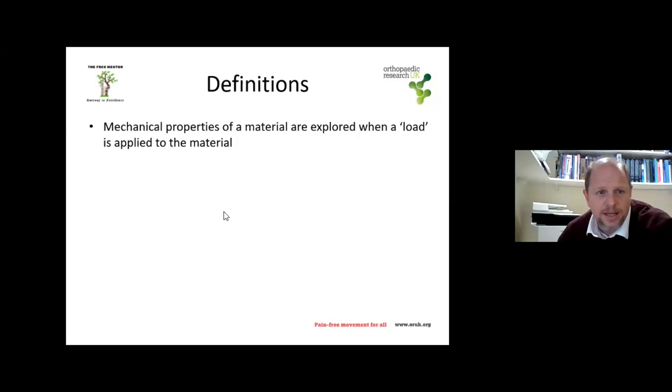And so material science is really about exploring the properties of a material, but we can't just explore them by looking at a material. We actually have to apply a load to a material and see how that material behaves when a load is applied. And that's one of the key things about understanding material science, that it's how a material responds to a load which is applied to it.

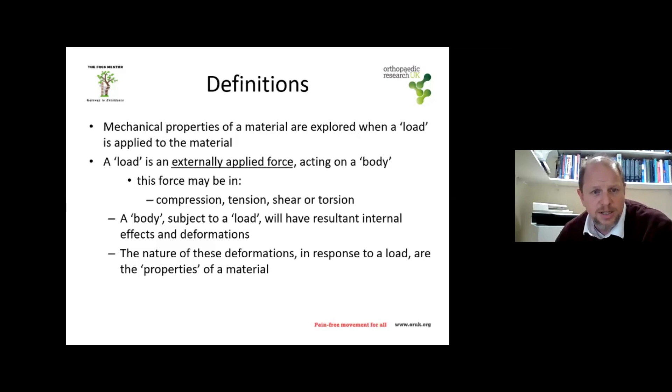And of course, as you can imagine, a load is an externally applied force, and it can be applied in different directions, like compression or tension, shear or torsion. And as soon as we apply a load to a body, there's going to be some internal effects or deformations of that particular kind of body. And those are the kind of effects that we're going to be studying in material science to give us a list of properties, mechanical properties or material properties of a certain type of material. And those are the kind of terms that we use.

Those deformations that I mentioned that happen to a body when a load is applied to it can either be elastic deformations, which are temporary. In other words, when you remove the load, the shape of that material will go back to what it was before. And plastic deformations are permanent changes in length or shape. And in general, and we'll see that on the stress strain graph in a minute, the degree of deformation is proportional to the amount of load that is applied to a material.

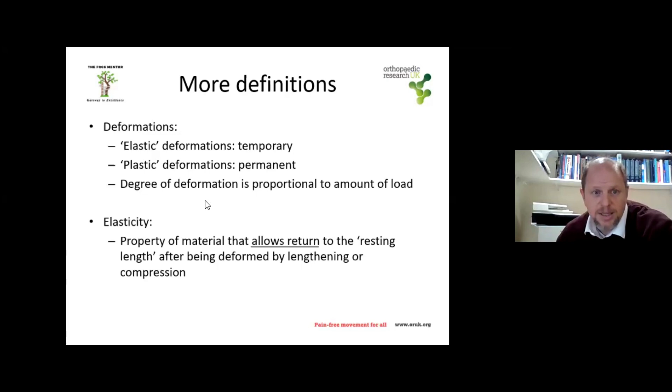And then we also have a concept of elasticity, and that's important for us to understand because it's the ability of a material to return to its original resting length after a load has been applied and then removed. So, again, we'll see that on the stress strain graph as well, but these are just some of the terms that we're going to be looking at.

What is stress in a material? So it's actually the intensity of an internal force. It's very similar to pressure. And in fact, it has the same units as pressure, which is Newton per meter squared or force per area, otherwise known as pascals. So whilst we can understand if a pressure is applied externally, we can understand that.

Actually, when we apply a pressure, when we apply a force to a body, we may not see any obvious deformation, but there will be an intensity of that internal force within the body. And that's really what stress is. It's used to analyze the internal resistance of a body to a load.

And normally something actually has to go on in there, because Newton's third law is every action has an equal and opposite reaction. So if you're applying a force onto a body, something is going to be happening within that body to resist the force that is applied on it, even if it doesn't move. So those are some of the principles.

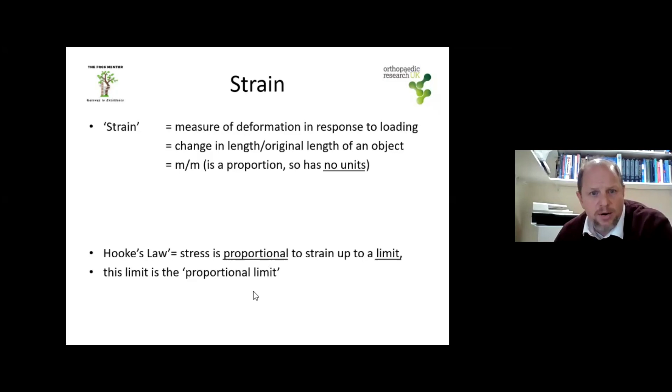So I want to come on to the stress strain graph. But before I do, I just want to talk to you a moment about the Young's modulus, because the Young's modulus is actually a measure in the stress strain graph of the slope of that proportional zone within the elastic zone. And the Young's modulus, which I'll show you on the graph in a second, is a measure of stiffness of a material. And quite often there are questions about stiffness of a material because it does have a relation to the effects within a system, like for instance stress shielding and things like that. So we'll talk about that in a second as well.

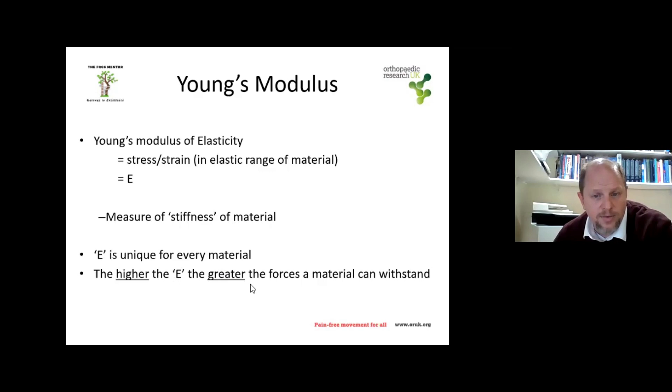And the E, which is the measure of Young's modulus of elasticity, is unique for every material. So sometimes we want to know where it is in relation to each other. So different relative Young's moduluses. And the higher the E, the greater the forces that a material can withstand. So let me show you this. This is quite an important graph to try and remember some of the details from. So it's the first time we've seen a stress strain graph.

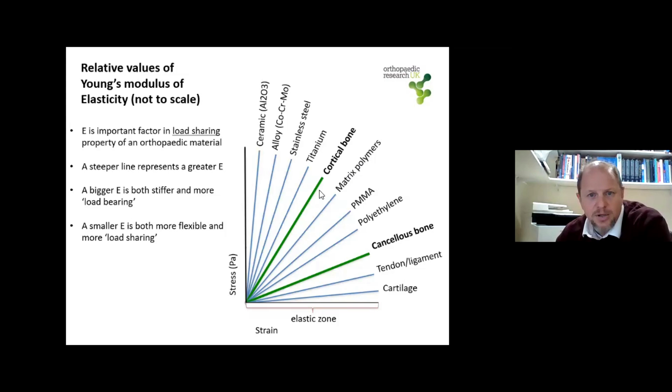You can see some of these other materials coming down here, like polymethyl methacrylate. You can see high density polyethylene there, cancellous bone, and then coming down to some of the biological tissues that really don't have much strength. So that's a pretty useful graph to remember, especially up at the top end, as those do tend to come up in multiple choice questions occasionally.

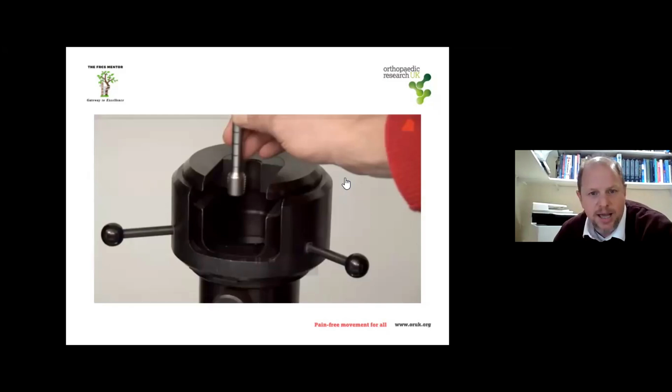And what that means is that the material is in the elastic zone. It is the elastic zone because it has the ability, if you remove the load at any point during that element of the stress strain graph, to return to its original length. If you go beyond the proportional limit, then new things start to happen, which I'll show you.

Unfortunately for us, the proportional limit has a number of different names which you can read in different books, like proportional limit, yield point, elastic limit. But within the context, you just have to realize that there's this absolutely critical point on the stress strain graph where you move out of the elastic zone into the plastic zone, and that is something like yield point or proportional limit, depending on what the particular question is asking.

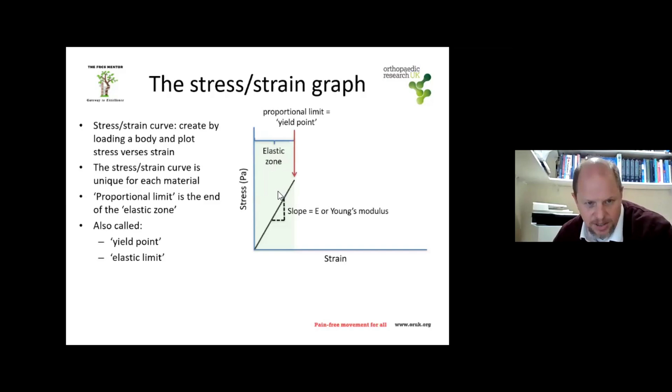So if we carry on along the stress strain graph, what we're going to see is exactly what we've looked at before. So we get to the proportional limit or the yield point. If we carry on applying this tensile strength, what immediately happens as you begin to get deformation within the material is it actually releases some of the stress in the material. So you can see the stress going down.

If, for instance, you took away the load at that particular point, you would get some elasticity, but you would not return to the same length that you had when you first started. And so you would have a deformation. And we call that deformation, if a load is removed, the plastic strain deformation. In other words, you've gone through the elastic zone, you've had permanent deformation, but then you've released it, and that's the final plastic strain deformation that you're left with.

If you don't remove the load and you carry on applying increasing load to that material, you find that the stress begins to build up again. The stress builds up and up and up until it gets to a point where no more stress can be held within that particular material. And we call that the ultimate strength. In this case, it's a tensile test, so we would call it the ultimate tensile strength, but it can be the ultimate strength. Sometimes we talk about, is a material strong? Well, that all depends on what is the maximum stress that that material can cope with.

A couple of other things that do come up that I want to mention about stress is that there are two other viscoelastic properties that we make use of in orthopedics. I haven't talked a lot about viscoelastic properties in this talk, but elastic we have talked about. Do you remember the elastic zone, the plastic zone? When you add visco, it's a measure of what fluids do.

And so when you have biological tissues like bone, tendon, cartilage, they actually behave slightly like liquids and slightly like solids. And together they have this thing called viscoelastic properties. So when we're talking about bone now, we have these two other material properties that I'd like to mention. One of them is called creep and the other stress relaxation. Creep, actually, you don't see that so much with bone, but you see it with bone cement.

And it's the ability of a material under a constant load to begin to flow like a liquid, ever so slowly, but it begins to do that. A good example of that would be in a very old building like a cathedral that's 1,000 years old. If you look at the stained glass windows in that, you see that although the glass is a solid, it's actually dripping over 1,000 years, and it's collecting at the bottom of the pane, and it's much thinner at the top of the pane.

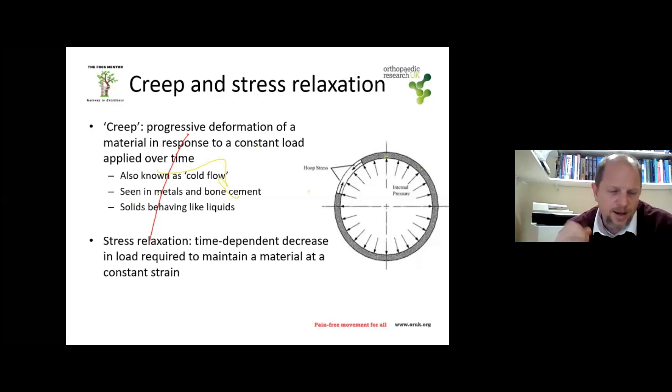So it gets a peak of stress, and then because it also behaves slightly like a liquid, it gradually dissipates. And that means that if you're hitting your acetabular cup in really hard and fast, but not giving time for the hoop stresses that are building up in the acetabulum to dissipate, then you can get a fracture. I've seen that with intramedullary nails going down a slightly unreamed isthmus of a bone. If you hit it too hard and fast, you're not giving time for the bone to relax, and as a consequence, you can end up with fractures because you're not allowing stress relaxation to occur.

So just coming on, just check the time, but I think we're okay for a few more minutes.

I wanted to talk about some of the materials in particular that we use in arthroplasty and orthopedics. When we talk about arthroplasty and some of the complications that we get, we're mainly looking at, in this case, some of the complications of metal. And I want to mention fatigue failure. Now, if you take a paper clip and you just move it gradually up and down, eventually it will snap. And that is called fatigue failure.

It's defined as repetitive loading cycles that are below the ultimate strength of material, but because there's so many of them, it actually ends up causing a fracture. And we can often see it, for instance, in plates. When a fracture is slow to heal, we end up getting movement of the plate, and then the plate will snap. They don't tend to snap because they're bad plates. They tend to snap because the fracture hasn't healed before you've got fatigue failure.

But in some situations, and an example would be an airplane wing, airplane wings do move a little bit when you take off and land. You don't ever want the airplane wing to fall off. So there's this concept of an endurance limit. And that means no matter how many millions and millions of times you put a material through a load, it will never reach the stress that will allow it to get fatigue failure. So you can repeatedly cycle it without fear of getting complications like fatigue failure.

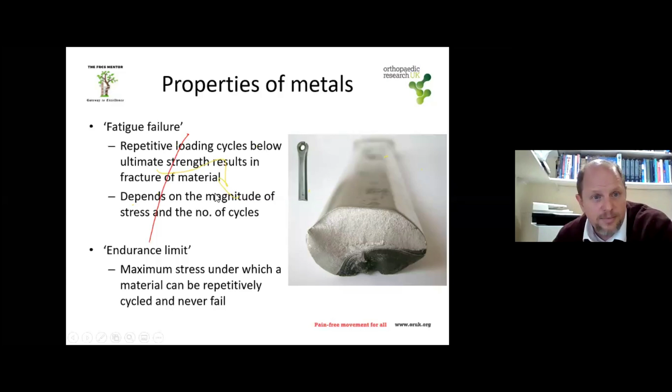So what about the metals we use? And I'm just going to talk really about three main metals: stainless steel, cobalt chrome, and titanium alloy. And stainless steel, as you probably know, is surgical grade stainless steel 316L, L standing for low carbon. That does tell you that it has some carbon in it. And so sometimes you can find questions that ask you about what kind of stainless steel that is.

There are two metals that have molybdenum: stainless steel and cobalt chrome. There's no molybdenum in titanium. So if you get a question that's talking about that particular element, then it's either one of these. And of course, there is carbon in stainless steel, but in this case, it's very low carbon.

And you can imagine if someone was to give you an Exeter total hip replacement in your Viva and say, what is this Exeter total hip replacement made of? You might say, that is a surgical grade stainless steel 316L. It's an alloy of iron, chromium, molybdenum, carbon. And the material properties, well, it's strong, it's tough because it's ductile. It has a Young's modulus. It'd be good to talk about that. That's not too far away from cortical bone.

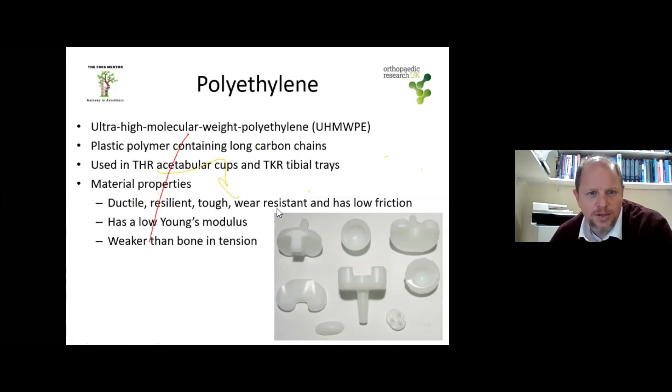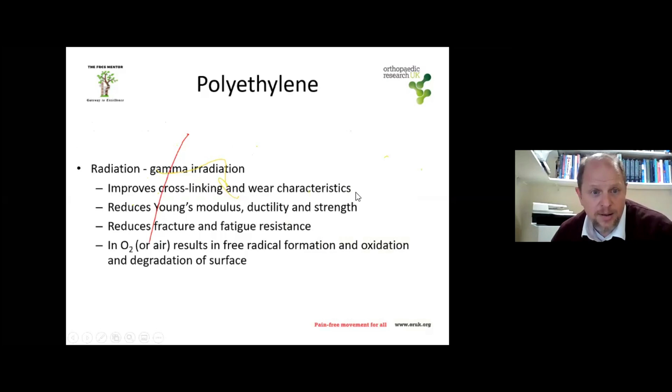One or two things about the material properties of polyethylene that sometimes come up, in that they can be modified by the radiation that's used to sterilize it. So actually radiation can improve its wear characteristics, but it has a negative effect on its Young's modulus, its ductility, and its strength. And historically, although they don't do it anymore, they sometimes used to irradiate in air, but that created free radicals, which led to very poor wear characteristics.

Moving on, bone cement. We know that it's made of polymethyl methacrylate. It's not an adhesive, rather a grout, and it helps to give us even load distribution. And one of the wonderful things about it, which we've mentioned already, is this ability for it to undergo creep.

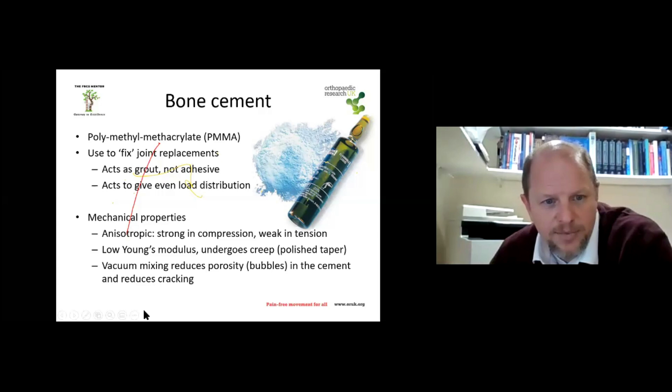I've mentioned this word anisotropic. Isotropic means that it has the same mechanical properties; it doesn't matter which direction the load is applied. But almost all materials, at least in the body, are anisotropic, and they will have different abilities to resist forces depending on whether they're in tension or compression. And people love to talk about vacuum mixing as well. You might have a view on that.

So coming up towards the end now, but I just wanted to mention ceramics. Ceramics, if you were to talk about their material properties, they are brittle. They have a very short distance between the end of the elastic zone at the proportional limit and the break point. They have a very high Young's modulus. It's even higher than cobalt chrome.

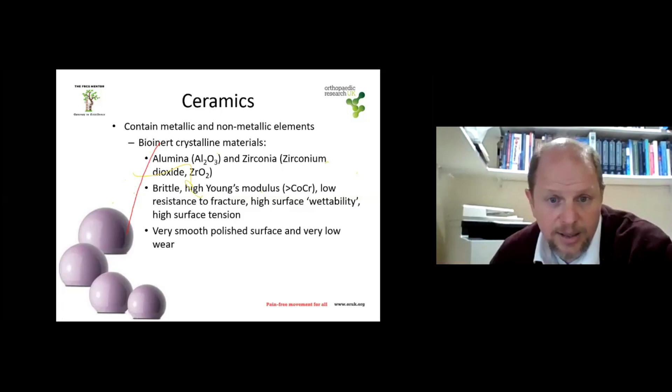They have this property called wettability. This is another one of those wear properties: its ability for a drop of water put on a ceramic head to spread over the ceramic head. And it does that in a much better way than if you were to put the same drop of water, for instance, on a stainless steel head. And you can polish them to get a very smooth surface, allowing you to have very low wear.

So I'm sorry for the speed at which we've rushed through some of the mechanical properties, but we've looked at that stress strain graph, and I would love it if by the end of this evening, you felt that you could draw a stress strain graph and mention some of the key things on it, like the elastic zone, the plastic zone, the proportional limit. You could explain what Hooke's law was. You could explain ductility, brittleness, strength, toughness, the area under the graph. That would be really good. And those things would get you through any Viva question that you'd be asked on that kind of thing.

We've talked a little bit about viscoelastic materials. In particular, I've mentioned creep and stress relaxation. We've talked about some of the particular materials. We've talked about 3 metals: cobalt chrome, stainless steel, and titanium. And we've looked at 1 or 2 of the other materials that we use in orthopedics as well.

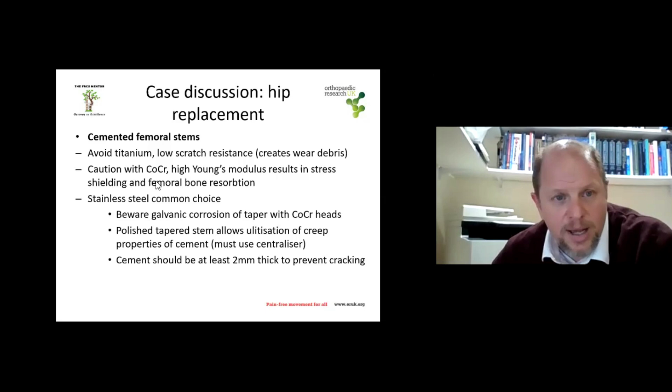So then, the second part of my case discussion is about what if you want to use an uncemented femoral stem. I know that they're becoming more popular, especially for younger patients, where you have a good morphology of your proximal femur. And if you're going to use an uncemented femoral stem, or if they ask you about that, you could change your material. And in this case, titanium would probably be the preferable material. You're not so much worried about the scratch of the titanium against the bone inside the femur. But here, what you want is to have a Young's modulus of your metal that's as close as possible to that of cortical bone to minimize the effect of stress shielding.

I can tell you more about stress shielding if you want. They might ask you about that. But basically, stress shielding is where all of the load is being carried by the implant to the distal bone. And the consequence of that is that according to Wolff's law, which is form follows function, if the bone is not being put under stress, then the bone will begin to gradually dissolve away and you'll have a reduced bone density in those places. So that's stress shielding.

Some advantages of titanium are that it has a great Young's modulus, but it also allows you to get different kinds of coating on it. You can either actually change the shape of the metal to create a better lock into the bone, or you can blast it with this plasma spray to put a ceramic like hydroxyapatite onto the outside of the titanium. It bonds really well at about 2000 degrees centigrade. And that then creates a very good ability for the titanium to bond into the bone.

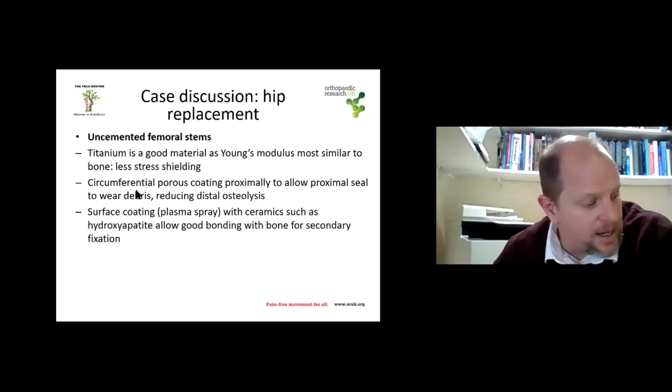So the last bit of this case discussion that I wanted to talk about was about knee replacements, because that's another way that this particular question about material properties can come up. They say something like, what type of knee replacements do you use in your practice? And then you say the name of it. In my practice, I'd use a Genesis 2 made by Smith & Nephew. It doesn't really matter what you pick, to be honest with you, as long as it's not crazy. But pick anything that's within the top 5 on the National Joint Registry.

But take a moment to find out what the materials are in those, so that if anyone asks you about them, or if you get the opportunity to talk about it, you can talk about it with knowledge. So most knee replacements actually use cobalt chrome for coating the distal femur. And the reason for that is that it actually isn't such a worry about stress shielding right down there like it would be in the proximal part of the femur. And you can really polish cobalt chrome so that you can get great wear properties.

The tibial tray, of course, is made of ultra-high molecular weight polyethylene, often cross-linked. But interestingly, the base plate is normally made of titanium alloy, which is a little strange because actually it's often cemented in place. And like I mentioned in the proximal femur, we don't like to mix cement and titanium, and yet in the proximal part of the tibia, it seems to be okay to mix those two together. Perhaps there's much less movement. Obviously, we're not relying on a polished tapered stem type model in the knee.

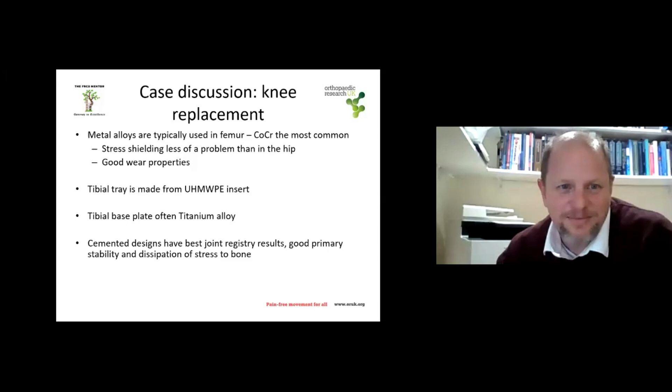Yeah, that's wonderful, Alan. That covers it really. I think these are the most commonly asked scenarios. So prepare for when an examiner asks you what hip or what knee replacement you use. They're not just interested to know the brand. You could throw in any brand, as Alan said, as long as it's a well-established one. But they just want to take you further to know why you use this.

So prepare one good answer, and be ready that everyone talks about Exeter. So everyone will be prepared, examiners and everyone. So if you're gonna say Exeter in the exam, you have to know all the ins and outs of Exeter and how it functions and the whole Exeter philosophy. So thank you very much, Alan.